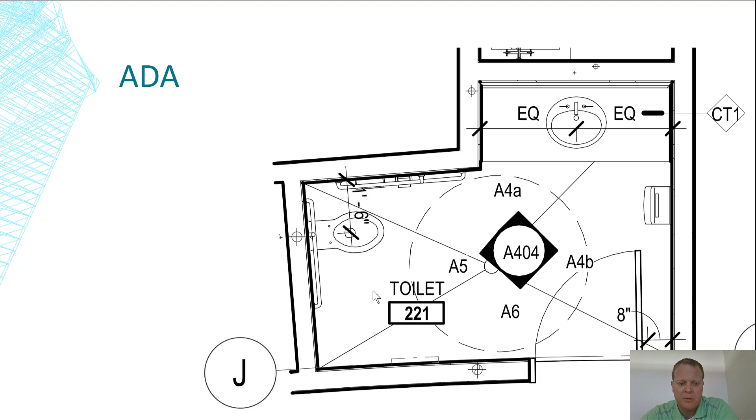But let's start with water closets, and we're going to spend a little bit of time here. I think we went through in another lecture the submittals and showed a little bit of these, but this whole lecture is just going to try and cruise through a bunch of plumbing fixtures and appliances and things.

So obviously we all know what a water closet's for. It's made up of vitreous china, a ceramic, and it's fired at a high temperature. Something I don't know that I've ever talked about is that water closets are rated at 6 fixture units. We mentioned that a while ago, and the fixture unit is something that when you look at it in the code book, there's no design necessarily for plumbing size - the plumber has to size it, calculates it off of fixture units.

If you had one water closet, the minimum would be a 3-inch waste and a 2-inch vent. Depending on which style, whether you had a flush tank or a flushometer, it would change the water, the potable water side. Let's say these are the two most common.

You have some that are floor set and some that are wall hung. Wall hung has brackets here, and so this is all stuff that needs to be coordinated. If there's hangers and stuff, there needs to be space in the wall for hangers. A lot of times these are in commercial buildings, so you don't see these too often in residential, but I have seen them in residential. The backing stuff is critical here.

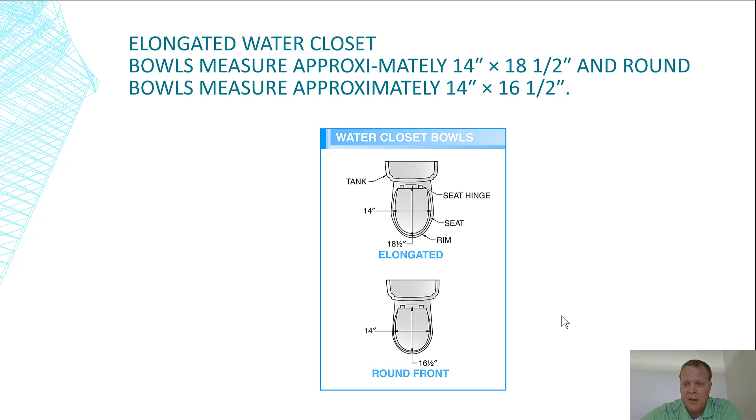This might be super obvious, and I hope it is, because that's what I hope it's obvious. There's an elongated bowl and a round front bowl. But if it's not super obvious, this is the class for that, because sometimes I over-communicate way too much. So those are some common types.

And then we're looking at a basic siphon type. So let's just jump into that. I don't think this is super important to look at, like knowing that this is the bowl - I never really had a meeting where we were talking about the bowl of a water closet, or the flush rim or the water spot. But you can see what they are. There's some science behind it. I think it's worthwhile. You can see this little jet right here to help it get the water moving.

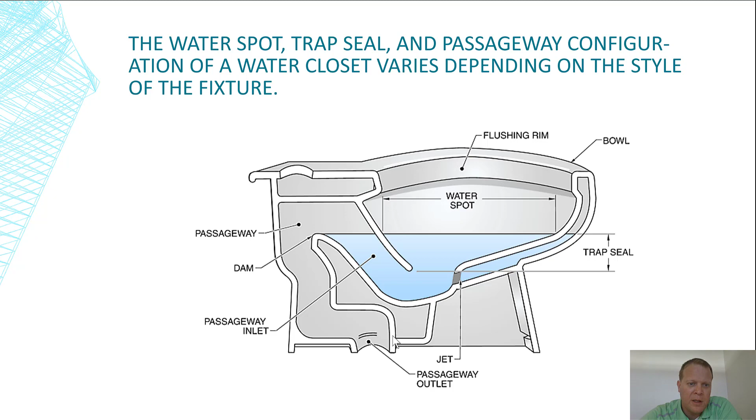So we'll look at this in more detail. Let's do that.

All right, so the siphon - remember water seeks its own level, right? So as the bowl fills up, like I was just talking about the jet, the jet's going to help the water get moving, and the bowl's going to fill up to a point where it's going to push a lot more water this way, and fill up this space, and as the water level rises over here, it's going to create a siphoning action. It's going to pull water out until air starts to enter, and then some water will come back in.

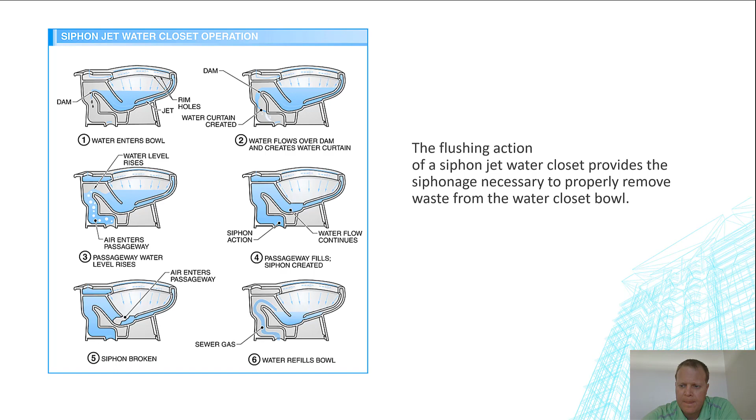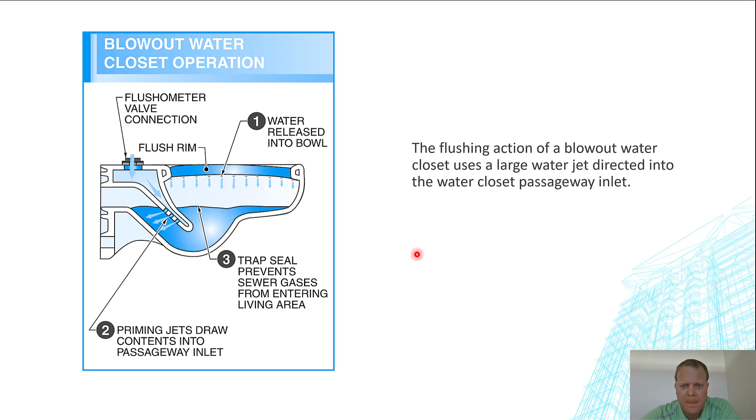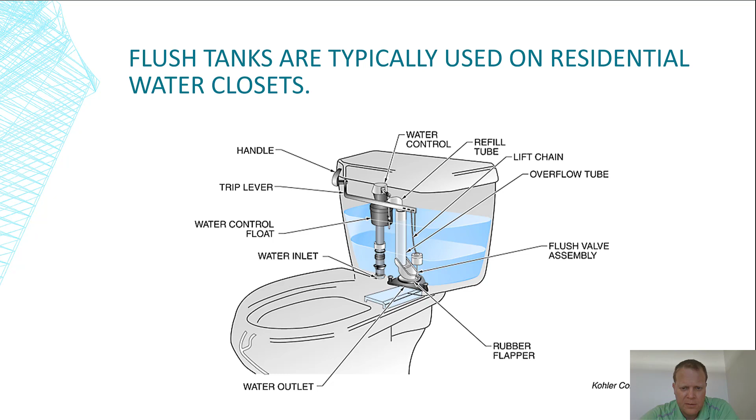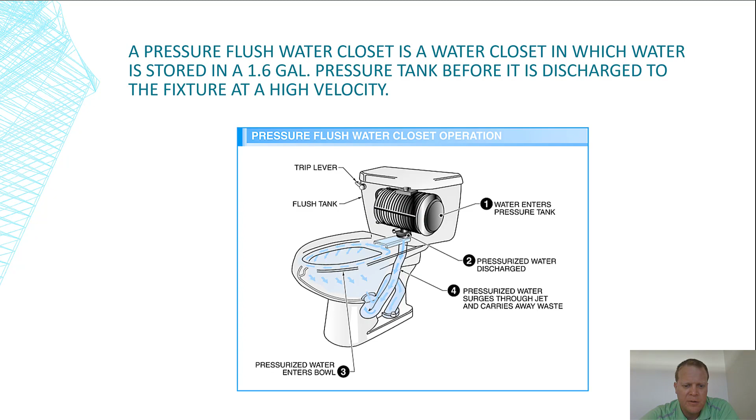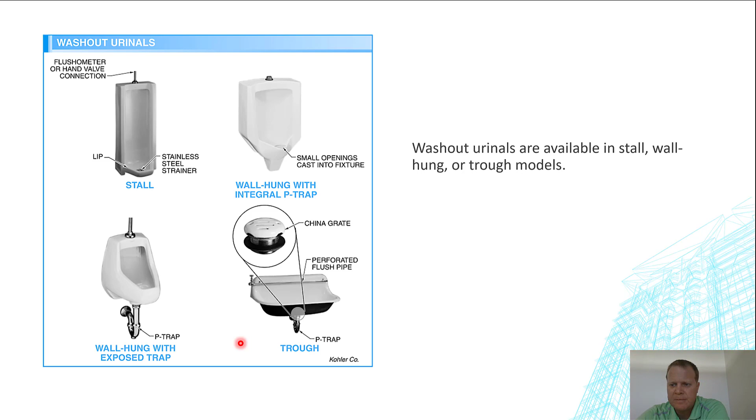Kind of the same thing - closer up here, we have the flushometer type thing, but it's built into the back, or it's going to be up into the top. There's lots of different options here, and you can kind of see where this is mounted up. You can't see the top one, but you can see that there. So this is definitely a wall mount, obviously, and it's got a trap in it, just like the water closet. The fixture units you'd have to have would be, for if you just had one of these, a 2 inch integral trap and a 2 inch waste and a 1 1/4 vent pipe if you just had one of these. Again, if you had a whole series of them, the pipe down line would have to get increased, but that gives you an idea with just one of these what pipe would be there.

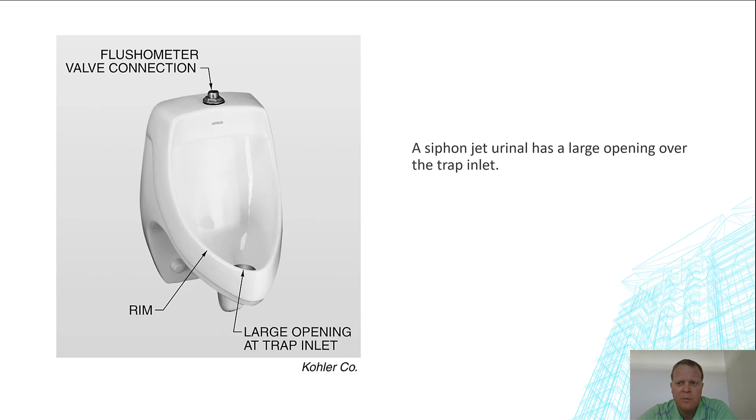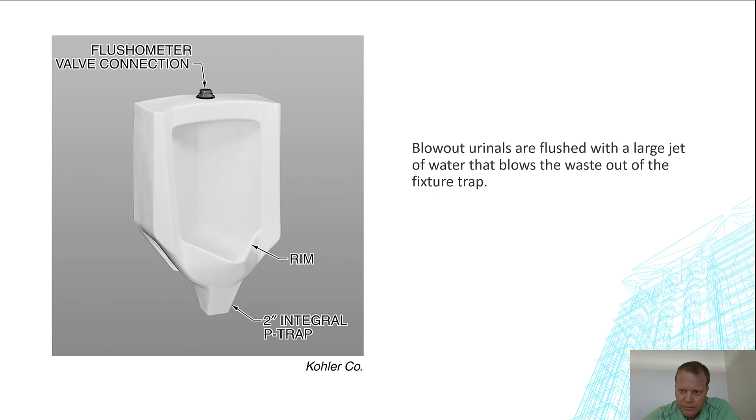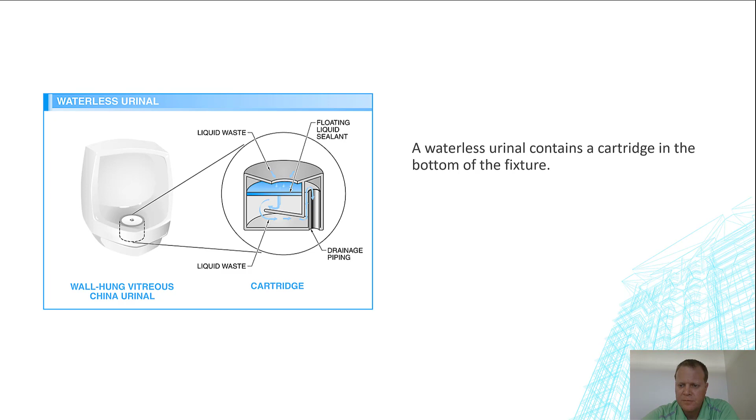So they're highly popular, and the point being, during construction and punch listing time, folks can say - this is in the commercial world, you know how they wear vests with reflective stripes. Well, those reflective stripes can mess with these sensors, and you could be 4 or 5 feet away and set this thing off with one of those vests. Then it'll show up on the punch list that it needs to be adjusted, but the person doing the punch list had a vest on, so it's not an accurate assessment of how sensitive the flushometer valve is with the infrared settings. Anyway, pretty interesting in my mind, getting punch list items on the infrared beam.

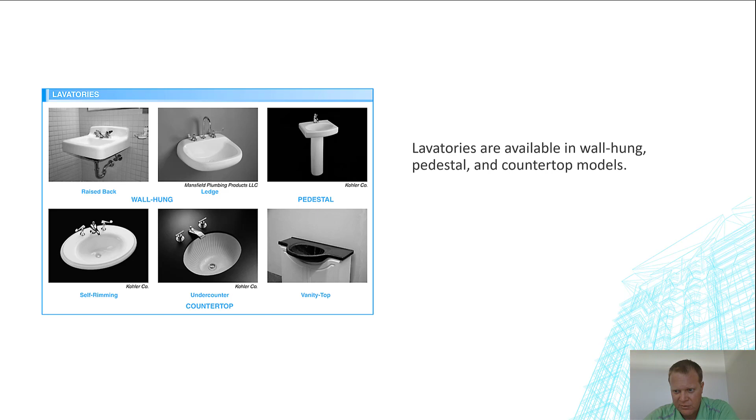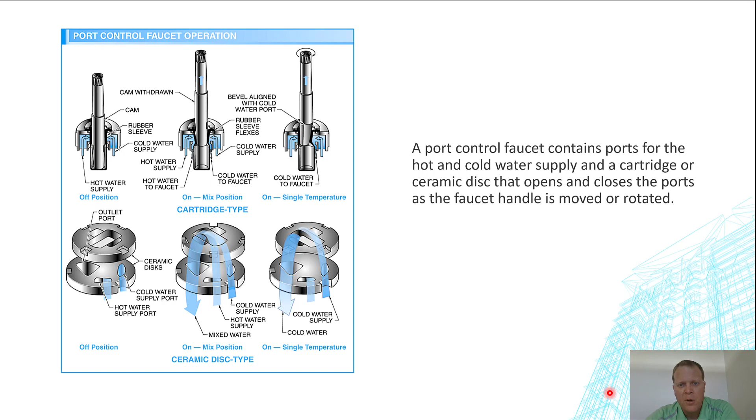I don't think that's super important, and I've never been in a meeting where we're talking about this, but I think it's worthwhile knowing how it works, even if it's just to get an idea for yourself of what it is.

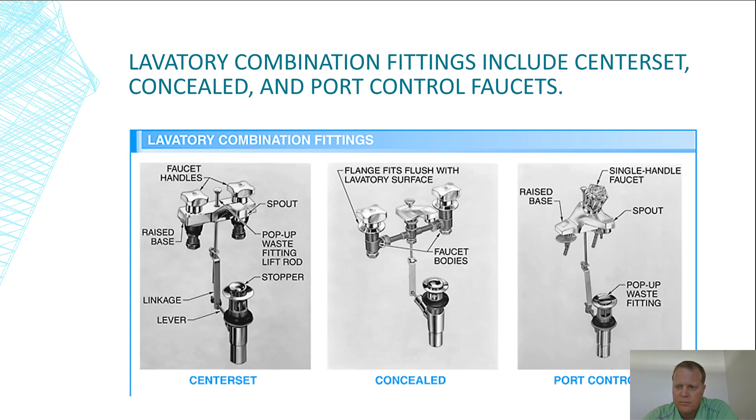These also have infrared options, and it's worthwhile to know that the extra money can be worthwhile, especially in this day and age where we're trying not to spread disease - that sensitivity can be very valuable to not have to touch anything. So that's the idea there.

Remember that tempered mixing valve that I talked about in another submittal? When we look through that submittal, that would be the case on this guy, because you can't adjust the handles. So that mixing valve down below is super important that it's set right so we don't burn or scald people.

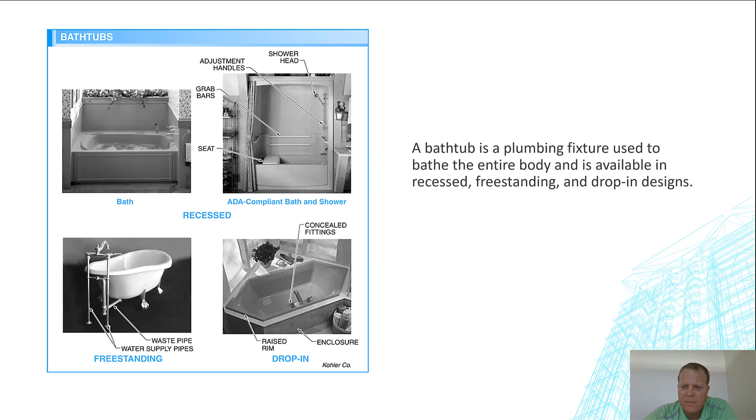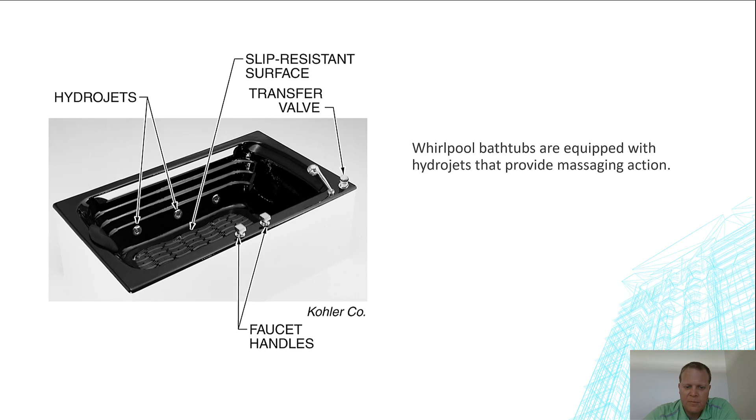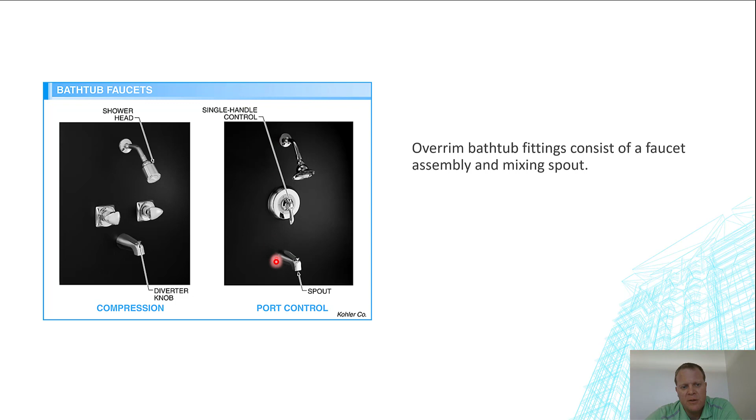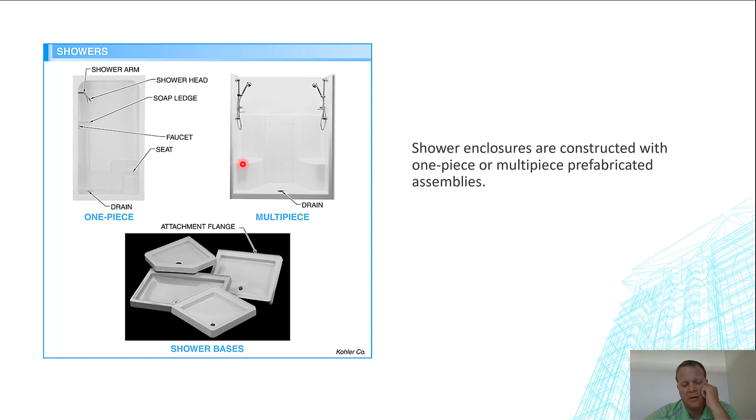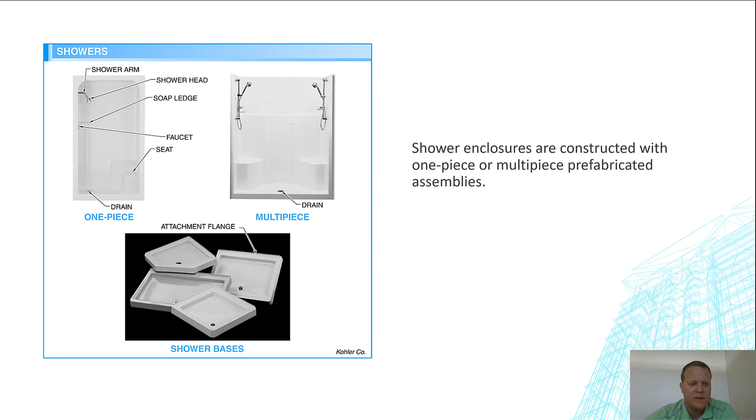We don't want to come to the end of the job trying to fit this thing in place and find we've got too many layers of drywall. It's happened to us too many times, it's no fun. You also have things like tempered glass that could be making this surround, sliding doors - I've seen sliding doors, all kinds of things that make a shower surround. So lots of different ways to make it, and again the dimensions are critical. A lot of this stuff is prefabricated, so the dimensions are important.

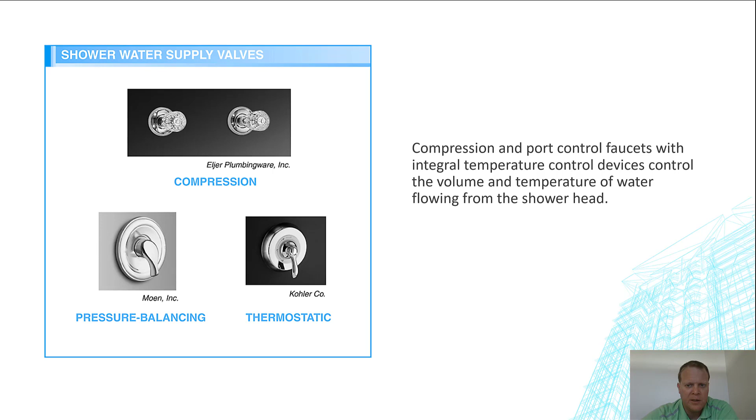So we've got the shower supply valves - again kind of the same point I was making about the tub, having to know exactly what your rough-in is going to be and having the valves installed during rough. Looking at my notes, I don't think there's anything major there other than, hey, there's lots of different kinds of shower supply valves.

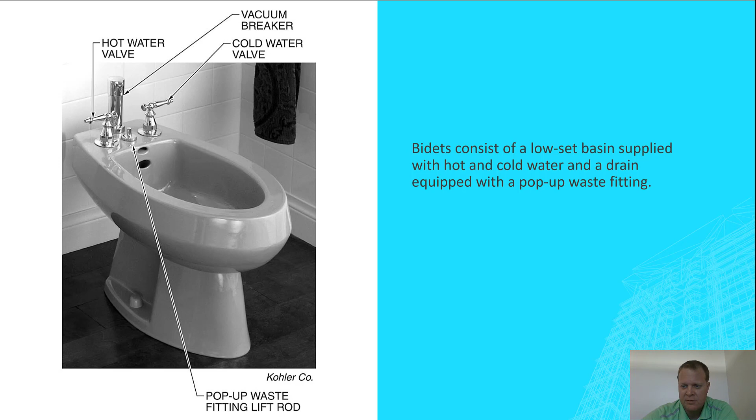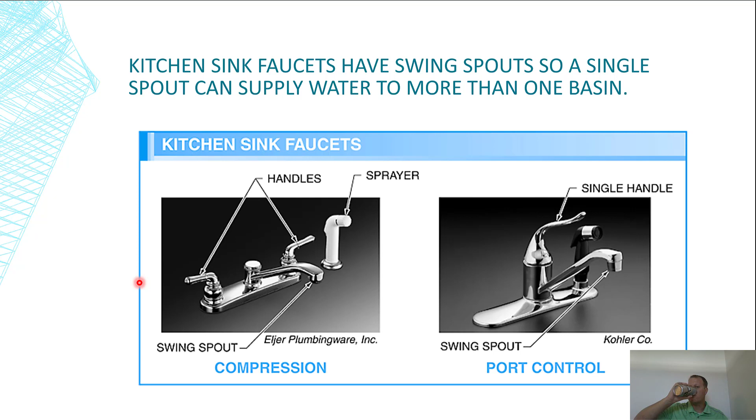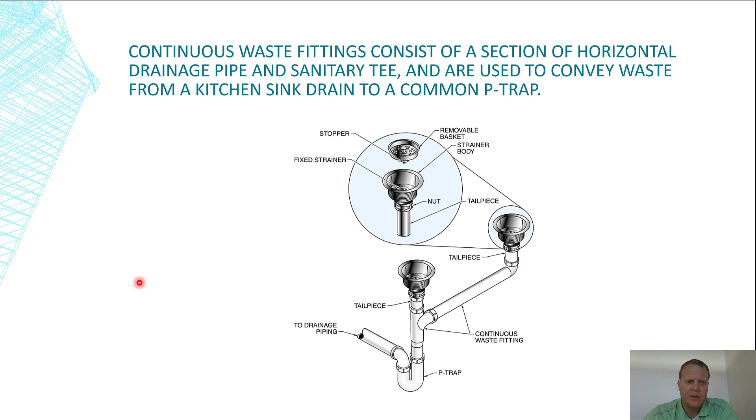We've got a sink here with two drains in it, just to show exactly what it would look like. We got a disposal here, and we did a kitchen sink diagram, so it might be worthwhile paying attention to this one because you're going to get an assignment to do that again in more detail.

Multiple systems, multiple utilities needed to make this work. Let's run through what would really be needed for the kitchen sink to work. You need hot and cold water, so that's the water utility. You need power, so that's electrical utility. If you want the water to actually be hot, you need a source to make it hot, so it could be an electrical water heater or a gas water heater. But if it's gas, that's another utility. And then you've got a waste line, so that's another utility - sewer. So just think of your kitchen sink, how many things are connected to just make it function. It's not just water and drain.

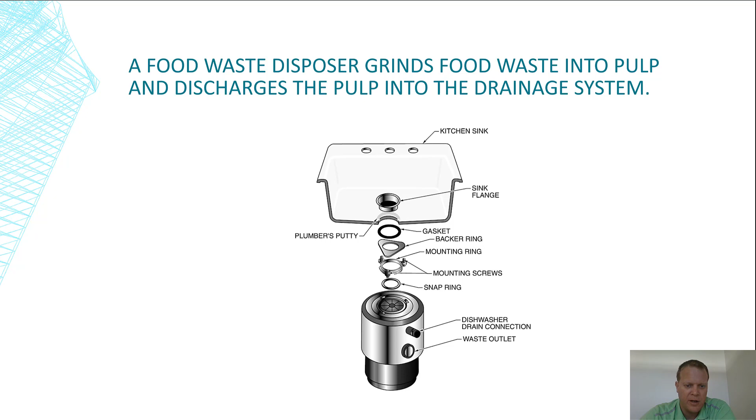A couple different configurations on how the dishwasher drain line has to be connected. If it's going through a disposal, which in our region is almost every single time - if it's not, the dishwasher has to have this little thing in it right here.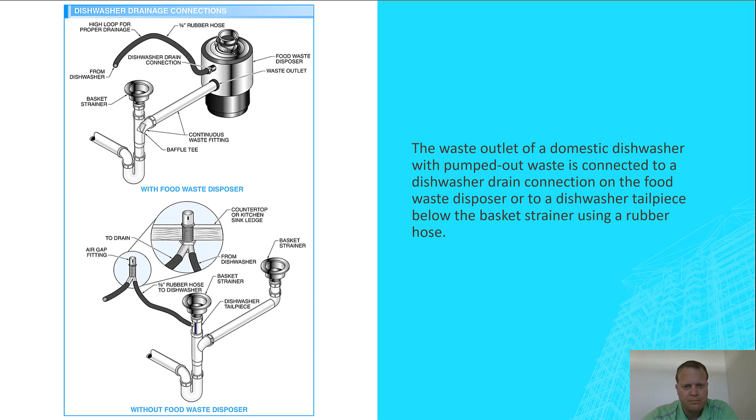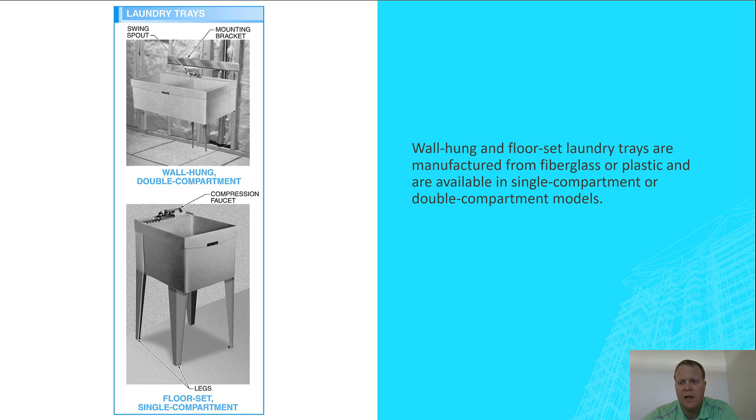Made out of all different materials, right? I've seen it stainless steel, plastic, ceramic. If I said fiberglass, seen it as fiberglass. Lots of different kinds.

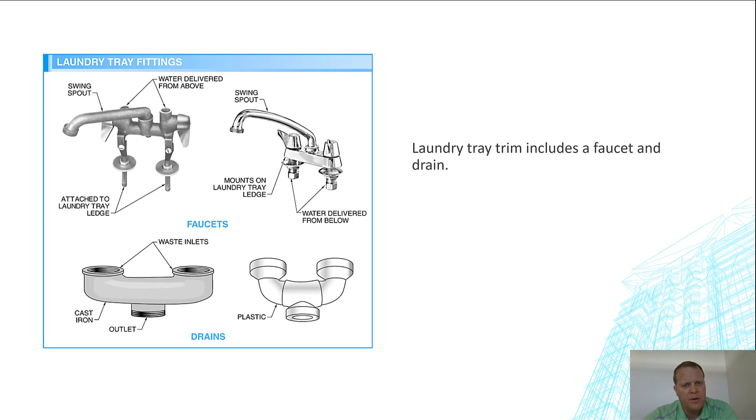And with that laundry, you're going to need a different setup for the faucet. A couple different options there. You can kind of see them, so just some different faucet options for laundry.

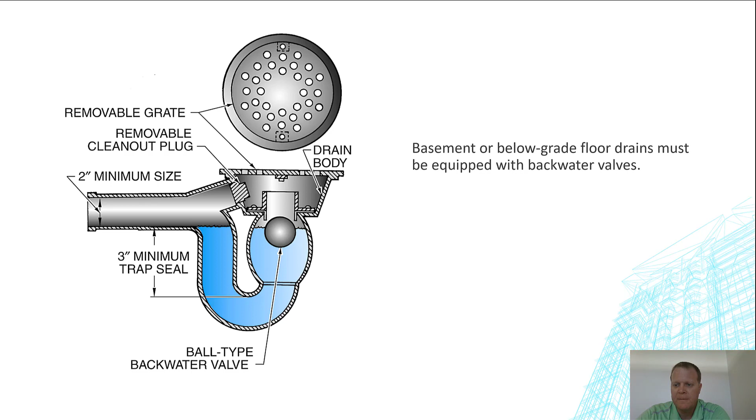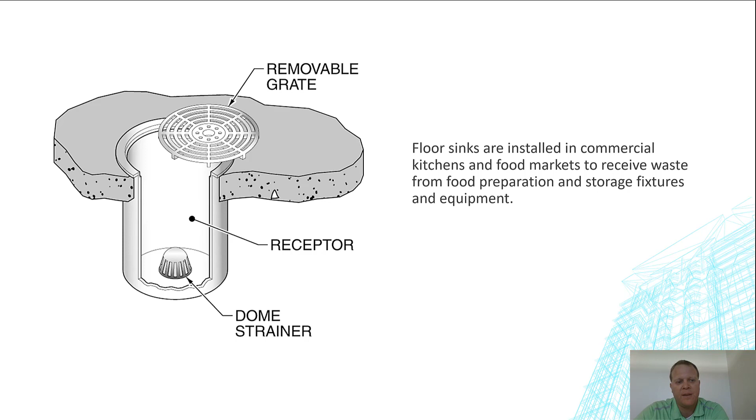Not too exciting on this topic. I'm sorry, but I do want you to know it. I think it's worthwhile, but I'm probably killing you here, like you're probably just dying because I'm having a hard time getting through this lecture. It's not exciting to me at all, but maybe it is exciting to you, and hey, that's really cool. All these different types of things are worthwhile to know. I've said that like 5 times now. It's worthwhile to know, and that's why I'm doing this lecture, but it's not terribly exciting to me.

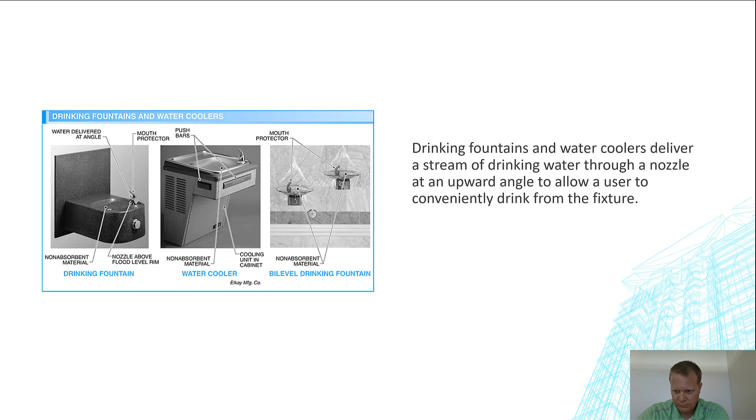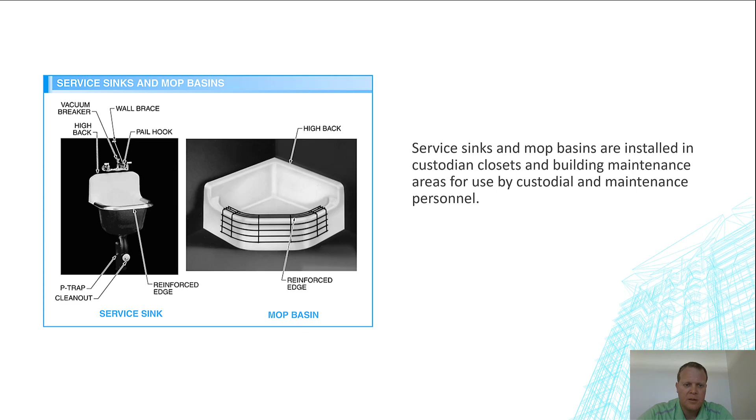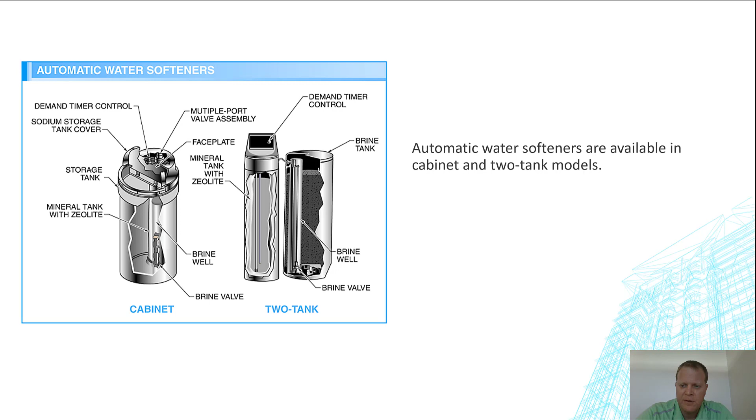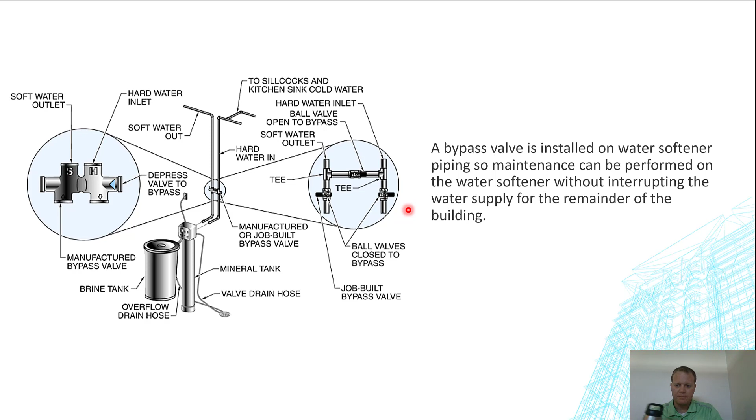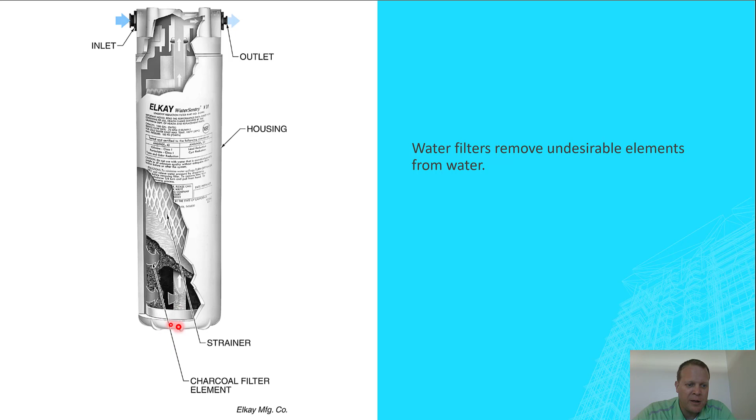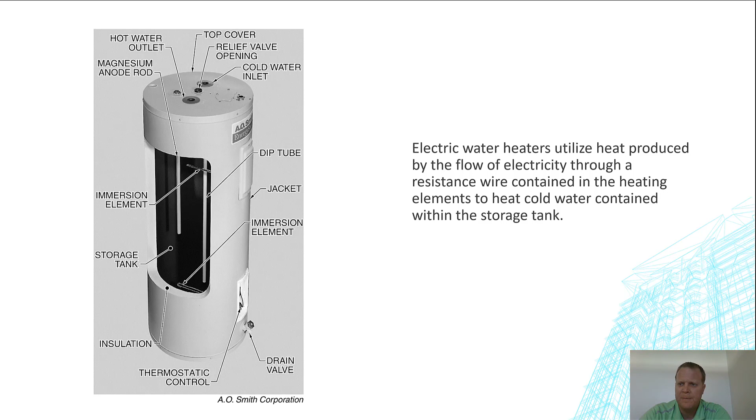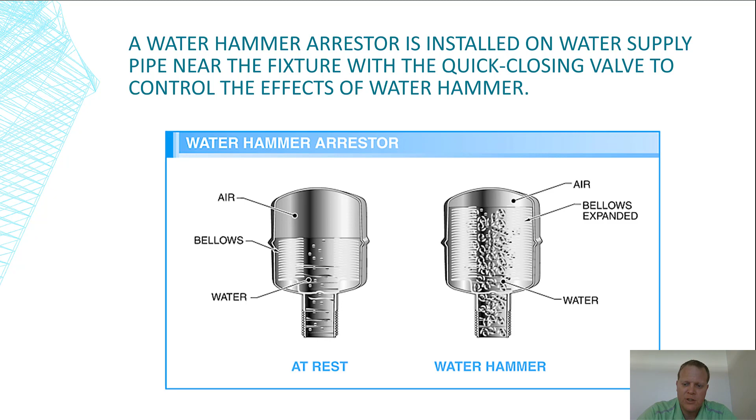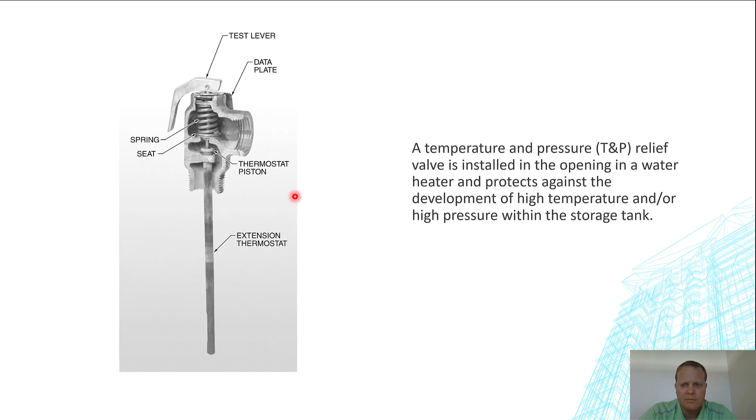All right, we're into ADA, and this is really important stuff from a commercial standpoint. I don't want to get to the end of my project and have to do rework. It is super common to have ADA problems inside of a building. On a residential single family home, I don't even think ADA applies, pretty sure.

But on multifamily type projects where you have apartments, specifically hotel rooms, or dormitories or things like that, this becomes a big deal. Also in the commercial world, any kind of commercial building is going to have ADA compliant stuff. So let's see if this will zoom in for me a little bit.

Okay, so on this one we've got... let's bring my laser pointer back up. Oh, it won't let me do both.

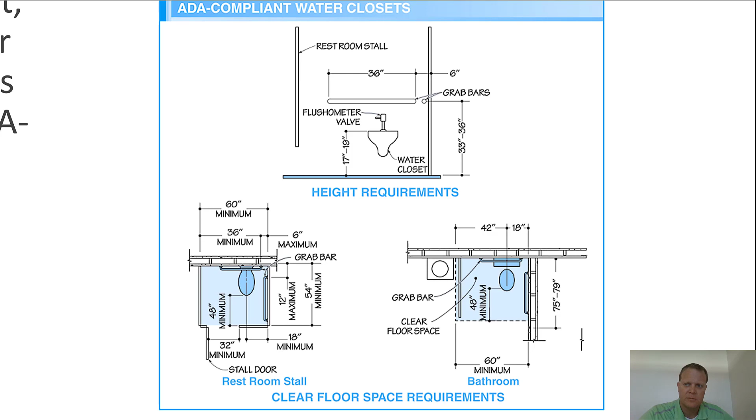And then they're showing grab bars, the amount of space before you hit the next restroom stall, that kind of stuff. Let's go look at the next one. Here we are at the urinal.

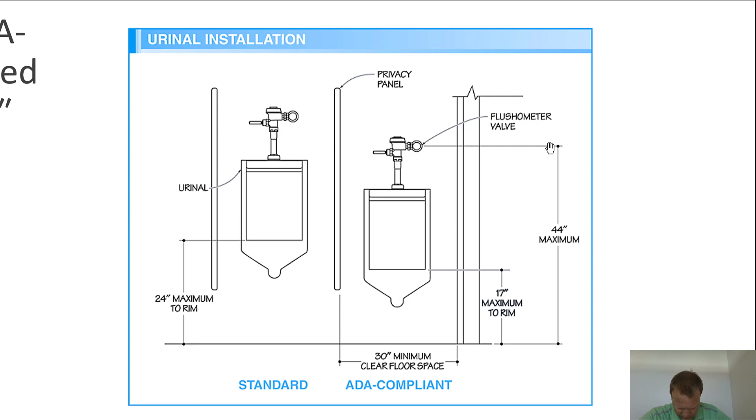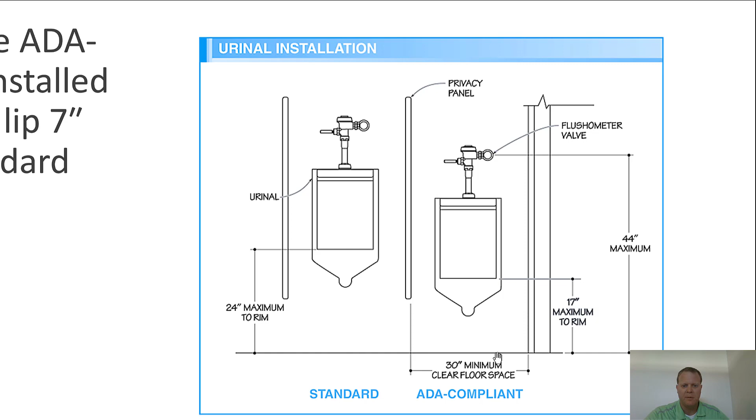They don't give you the how far out from the wall. So the wall's here and how far out, but 13 and a half inches is the max there. And they have the minimum floor space, I think I already said that. It's worthwhile knowing all this stuff. I'm going to show you in a set of drawings where to find this in a second.

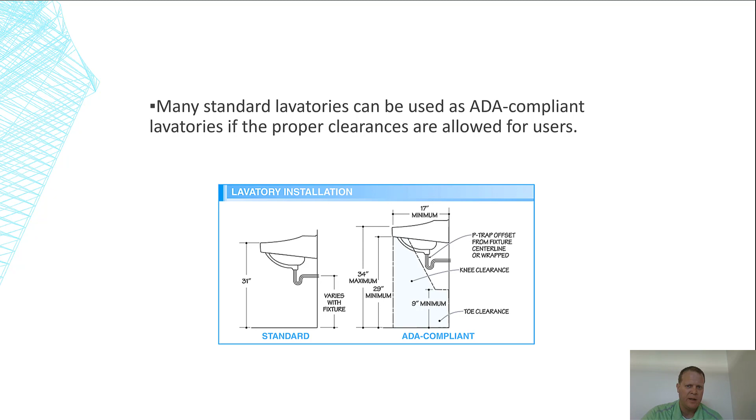Now the lavatory, zoom in on that. We've got a standard thing over here at 31 to the top, but ADA is 34. And let me look at my cheat sheet here. Throat's getting dry from talking.

I got 29 to 34 on my cheat sheet. Oh, hey, they do have it. Okay, 29 to 34. So it matters a lot what lavatory gets purchased.

Some are specifically made for ADA compliance, and literally some of them have zero tolerance, meaning it would have to be installed exactly at 29 in order to hit 34 and to be able to have this knee space back in here. So that the knee clearance is also measured. And so if you don't get the right bowl, you don't have the knee clearance, even though you might be set at 34.

But I really don't like that when they pick out a fixture that has zero tolerance, because you'd have to hit right at 29 in order to get 34. But if they do, it's not that it's not constructible. You just have to really be paying attention in order to get it right.

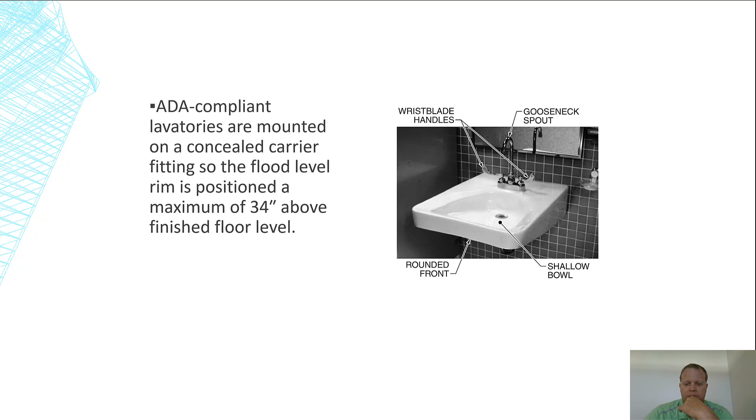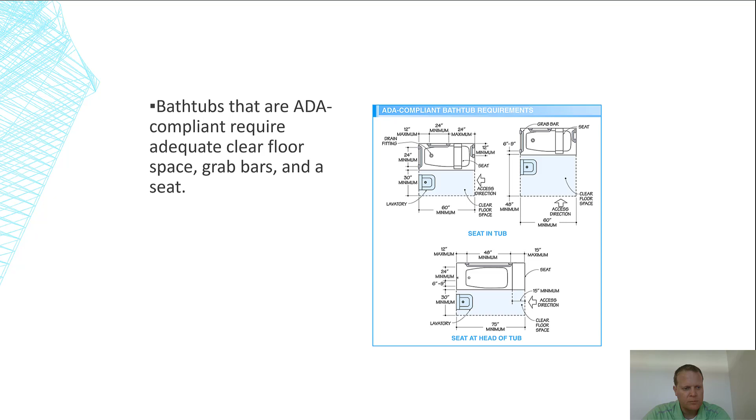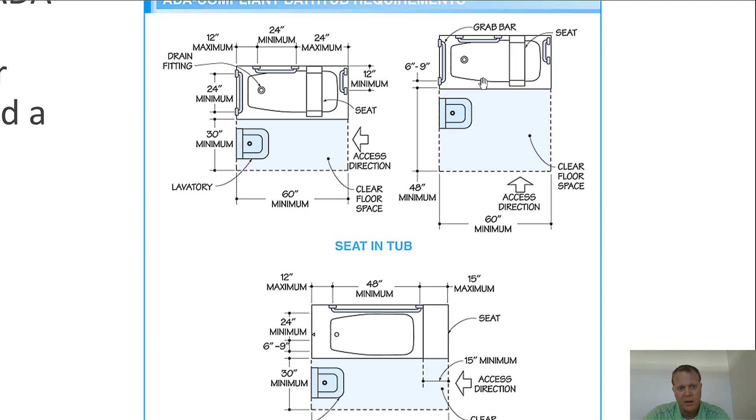Now we're getting into bathtubs. So what do we have here? We have a seat, and the grab bars are all dimensioned out, and the distance from the lavatory space still has to be 30 inches, and clear floor space, all that kind of stuff. The 60-inch dimension. So a whole bunch of stuff when it's requiring a seat or ADA bathtub right there.

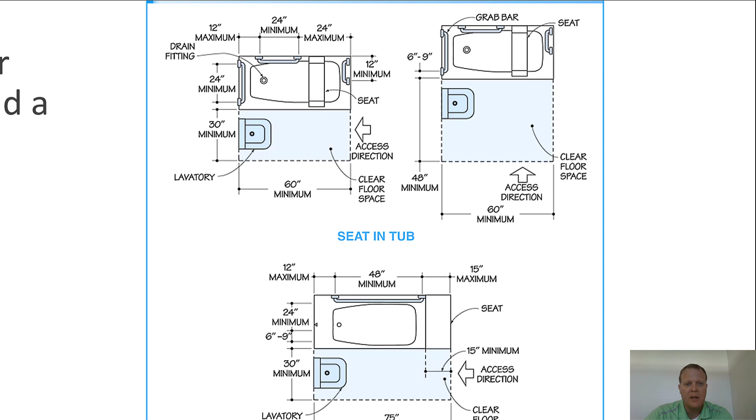This one we've got a seat up here. Some of the things that matter: these seats, when resting on the tub itself, are not a big deal. Some of these seats are kind of cantilevered out there and not resting on anything. Hopefully I have a picture of one here in a minute. Let me look. Yeah, let's look at that next one.

Some of it has to be done way in advance, like the backing for that, it's a big deal. The ability for not having lips to get in and out is also important. Let's see if my cheat sheet has that. One half inch is what it's saying that lip can be. So the floor level to the height of that can't raise more than a half inch right there.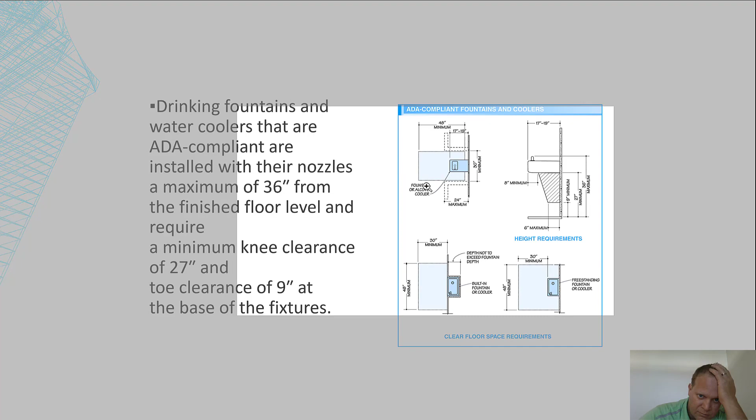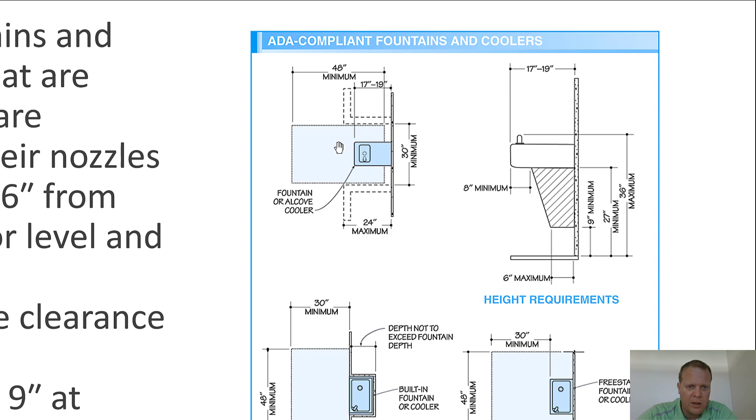But this is interesting too, that if you have a wall coming in, let me zoom in. If you have a wall and it kind of recesses back for this water cooler or drinking fountain, you have to have an amount of clear space around it. I hope you can imagine why, but it would make sense to have this in an alcove so people can get by in a really busy corridor or hall. But then paying close attention to the clear space, the minimum 30-inch clear space surrounding that is a big deal.

Okay, looking at a set of drawings here, we've got where do we find the ADA compliance information for a larger set of drawings. So like I said before, we probably wouldn't find ADA stuff on a single family home, but you would on multifamily. They might not have a detailed page for smaller multifamily stuff, but sometimes the city actually gets involved. If they don't have it, you can't get a permit on even some of the smaller multifamily, like a series of condos, where they'll say you have to have some percentage of these be ADA - convertible, I think maybe might be the right word. But in this case, we're just going to use the larger set of drawings.

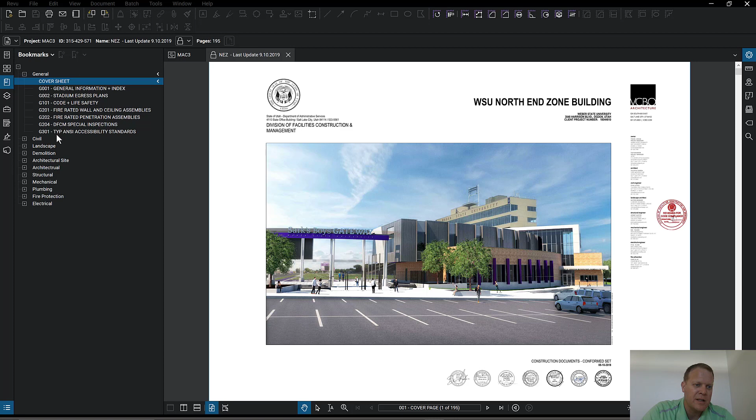We've been using this set of drawings for a long time. And where would we find information regarding this? Well, the architect does them usually, and almost always they're in the general set. You can see typical ANSI accessibility standards. They didn't list ADA because ANSI is also part of it. But let's just take a trip through it.

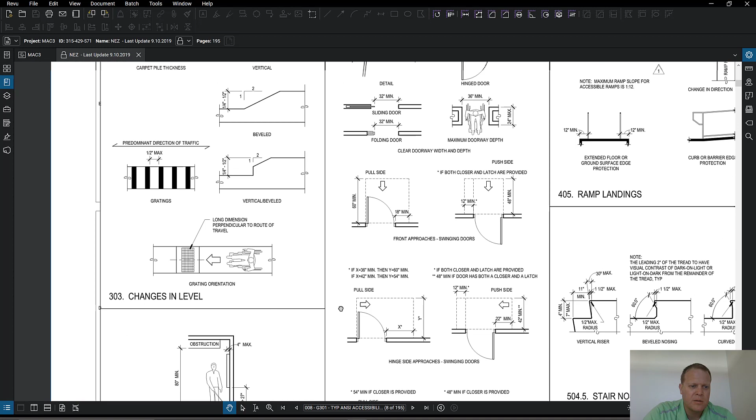Maybe we should start in - well, that is the start. So I've got this changes in floor level issue, and pathway, and they've got doors, all kinds of door stuff here, ramps and landings. Now we're getting into toilets and toilet compartments, and we just looked at these in - I think you did a better job, look, 17 to 19. My graphic on the PowerPoint didn't have all that.

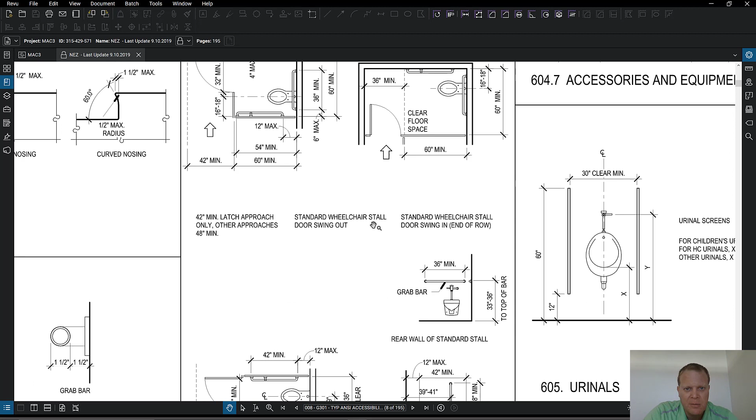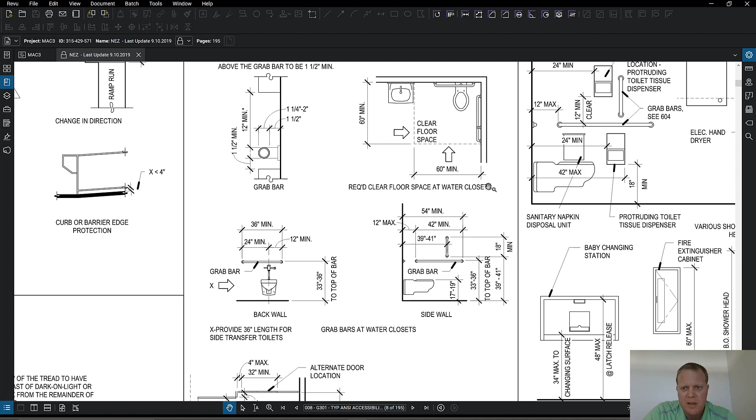And they've got the 36-inch clear, and yeah, they've done a better job than my graphics on my PowerPoint. Yeah, 16 to 18 again, 60 inches, again 60 inches. So basically that circle that you see, that 5 feet - I'm gonna go try and find some of those in the drawings where you can see like these square spaces or the circle spaces, and you know, oh, that's ADA, we gotta pay attention. Not that you don't have to pay attention all over the place. Hopefully you can see all these little things. You got showers and stuff right here, a whole bunch of bench details.

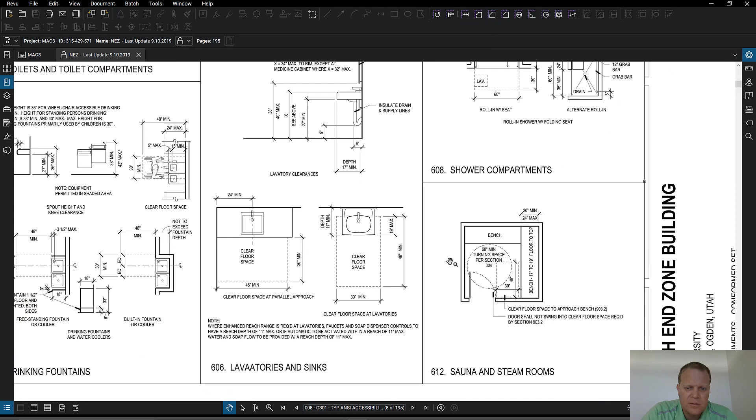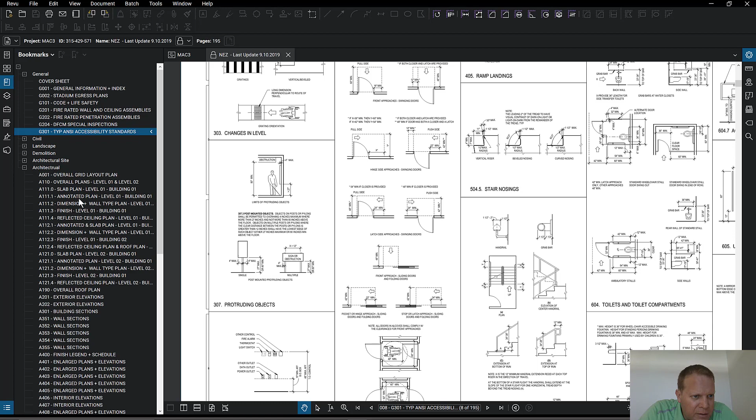So where to find it, again, back to the set of drawings. Almost always there's a set in the G. And then let's go to the architectural, and let's go to the floor plan, and let's just see what we can find when it comes to this.

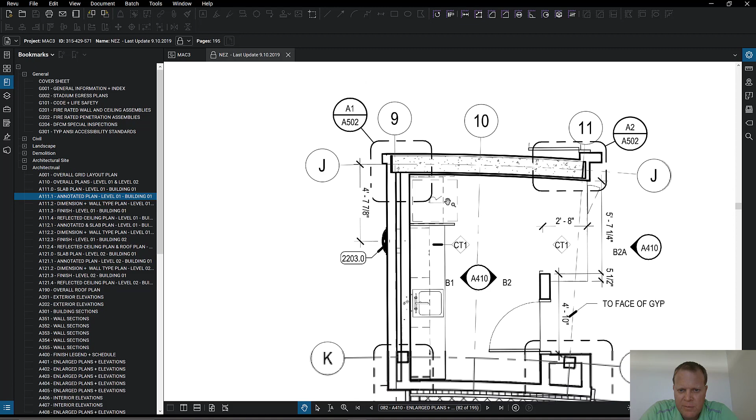Right there, do you see that square right there? Almost always that kind of stuff means, hey, this is the space we need right there. But that could be a refrigerator. But that's the kind of thing I'm looking for. As you can tell, this maybe wasn't the best planned out idea. I just kind of jumped into the drawing to see if I could find some for you.

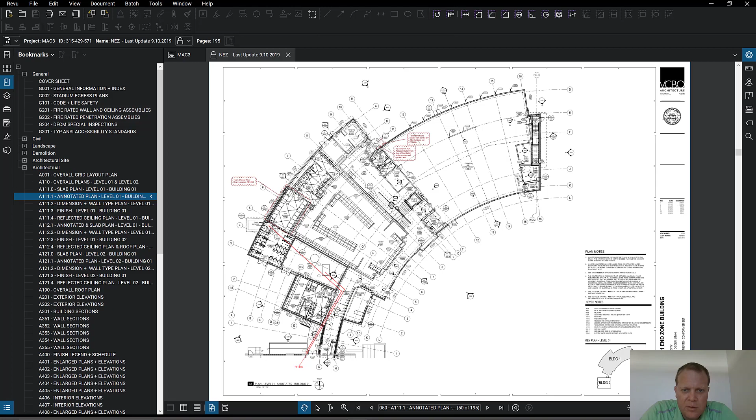Well, let's try this one. Let's try this - B3 A403. Oh yeah, there we go, that's what I was looking for. Like, you see these circles? Architects saying yeah, they got plenty of room to turn around right there. And then 1'6", 1'6" - for sure, this one's the ADA compliant one. It's got all the grab bars and stuff. This one's also got grab bars, so this one's even bigger.

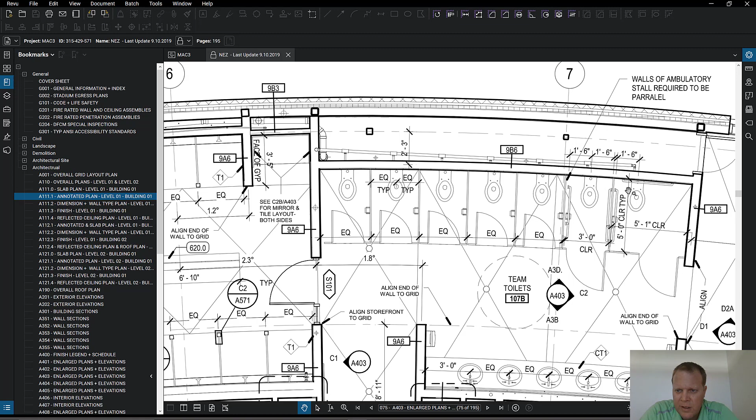And so when they start detailing these ones out, okay, well, we got to pay attention to those for sure. If there's a problem, now we need to shift things out an inch or half inch or something - don't do it in these two, you could do it in something over there maybe.

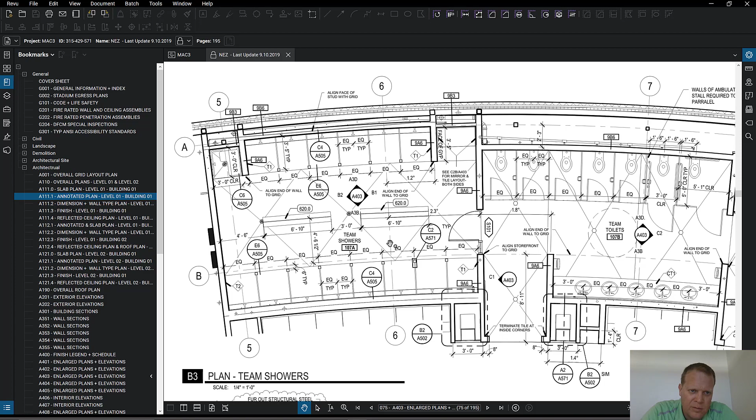Look, there's one right there. So they gave 36 inches typical, but that was already an ADA requirement. Yeah, they've got in the shower, they got a grab bar, they got a shower seat. So anyway, you'll find these all over the place in the drawings, because the designers have to plan it out.